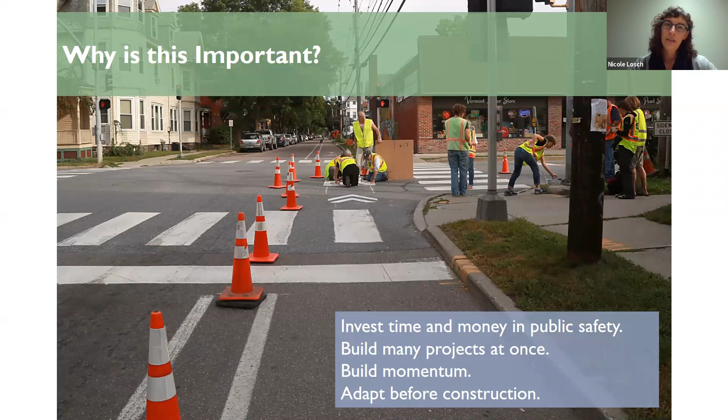What we found is that our quick build projects cost about 25% compared to a traditional construction project. So we're able to do a lot more for safety improvements in a shorter time frame. It also helps us build momentum with the community to get interest and support in these types of projects. It also lets us adapt and make changes to these projects before we come in for that full reconstruction.

When we initially developed this program and some of these projects, there were a lot of questions about whether these are legal projects. Do they comply with the design guides and standards that are out there? Traditionally, our engineers use the Highway Capacity Manual, AASHTO's Green Book, and the Manual on Uniform Traffic Control Devices. We've really looked to the NACTO design guides more recently. They still comply with these other design guides, and by following all of these guides, we found a way to still follow a traditional design approach, just using different materials.

Some of the key principles in the NACTO guides that are leading us to advance our projects are, again, recognizing our streets as public spaces; as we transform our streets and make them great streets, they can be really great for businesses. We're designing for safety. We're designing for our streets as ecosystems.

So as we come back for more permanent construction, we're trying to find ways to incorporate stormwater management and better sustainable and environmental systems. We recognize that our streets can be changed. They've changed over time. I mean, Burlington was originally designed for horses. They've evolved. We're now in the era of really accommodating cars, but kind of transitioning into what we're seeing as more of an interest in accommodating bicyclists, transit in a better way, and pedestrians.

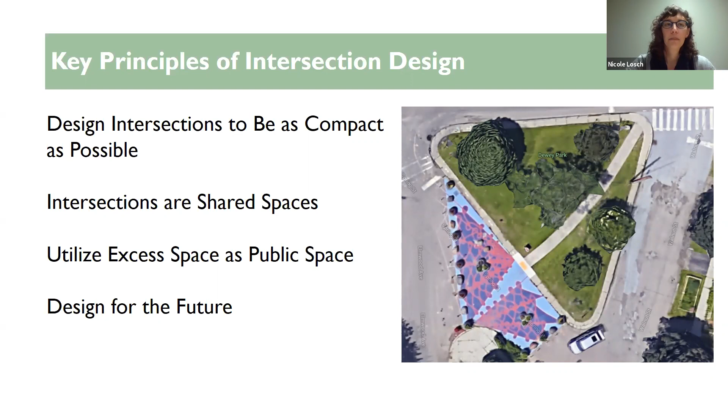So as we've developed our approach to trying to deliver these projects, we have basically a lot of options, and a project doesn't need to follow this in order as it's shown here. They can kind of jump in at any point along this project delivery schedule. But at its shortest time frame, we can do demonstrations. Sometimes these are an hour, they can be a week long, they can be city-led, or we have a permit process that allows the community to lead these as well.

We also have a pilot program. This is established in our city ordinance, actually. It allows us to do these for up to 30 days. That's our most common. But occasionally we'll have a bigger project, and so we will consider how to do it for a longer time frame, and that allows us to just collect a lot more data and allow the community to really adjust to these big changes before making a final decision.

The interim design phase, or our quick build approach, is really kind of mirroring the footprint of a permanent construction project, but we're just using materials that are less expensive and quicker to install, with the intent that it will be in place for usually up to 5 years while we program the funding to come back in and reconstruct it.

So I'll walk through a little bit about our demonstration projects themselves. Again, these are ones that the city can lead, or we can work with the community to let them lead a project themselves. And demonstrations are kind of in our blood here in Burlington. The Church Street Marketplace is one of our most iconic destinations. If you've been to Burlington, I'm sure you've walked along Church Street. It's our pedestrian marketplace, and it started as just a day-long demonstration.

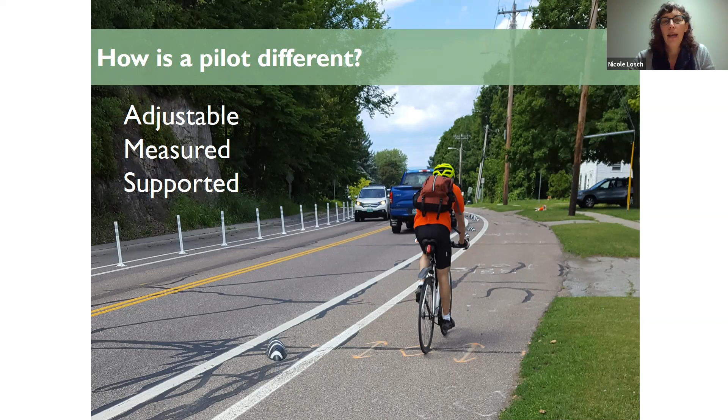One tool that's often helpful with all of our projects is just a way to visualize what's going to change on the street. There is a great tool online called Streetmix that allows you to do this kind of cross-section of a street, and it's really just a mix and match platform. You can change all of the measurements and the street features that are included there. But this can be a helpful component as you're developing designs. Not everyone is familiar with sort of that plan view. It's hard to visualize, and so this can be a good resource.

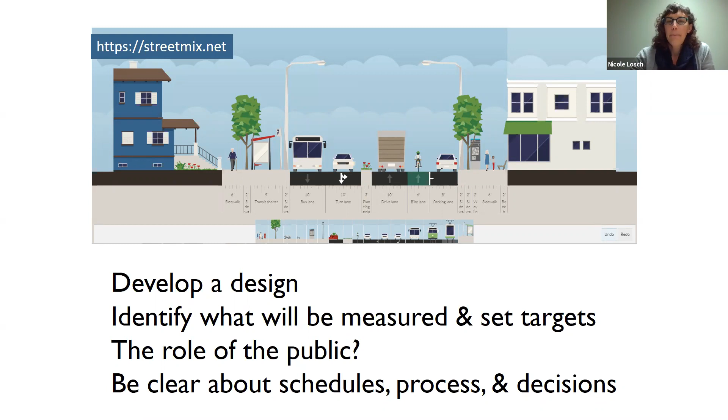The other metrics that are sometimes helpful to consider are things like crashes, travel times. If you're doing the type of project that is going to change how traffic is operating, you may want to measure traffic speeds or volumes. You may want to measure the volumes of other modes as well, and also measuring public input that can often be as important, sometimes more important than all of the hard data itself. So we're always collecting both the quantitative and the qualitative data with all of our pilots.

And again, keeping the community informed. Burlington has really involved community, and so we need to be clear about how, when, and where they can provide input or specifically inform the decisions. We take a lot of time to try to meet people where they are when we're getting this information. We use a lot of surveys and polls, and we recognize again that the public opinion can also hold more weight than some of the hard data that we've collected.

So our last kind of quick build approach in our interim design program, we just have developed over the last year. We have a new design guide as well. So again, we have a link to this on our website, and I've placed this at the end of the presentation, but this is available for anybody to use. It has really two components in the guide itself.

One, we developed design standards, and we wanted to develop these so that we could have expedited delivery even with these small projects. So this has allowed us to really define, how wide can a curb extension be? What are the angles of the curb extensions that we need leading into it, recognizing that our intent is to leave these year round. The snowplows need to be able to operate around them. Emergency vehicles need to be able to get by. So all of these level of details have been included for all types of projects.

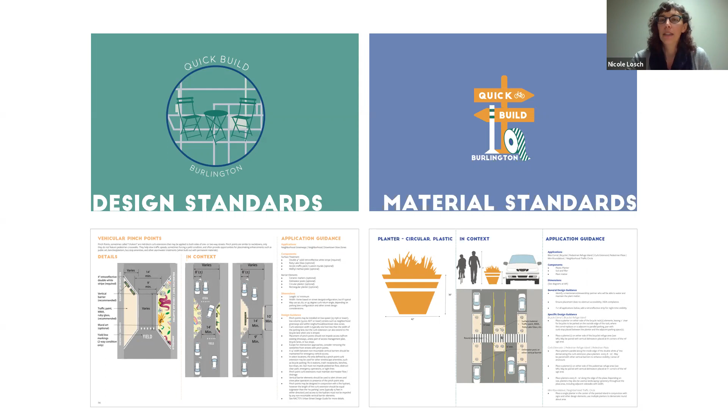And we've also developed our material standards. This will likely evolve over time as we identify new materials that we want to try, or realizing that some are not working well. But again, this helps us, we can do some quick cost estimates at the beginning of the year, have available quotes ready, and just quickly order materials and get a project moving without taking a lot of time to figure out how we're actually going to find the materials to make these projects happen. So this has all helped us to roll out a lot of projects over the last 18 months.

We've also been able to take a lot of our projects that started out as community demonstrations and turn them into a more quick build approach. And so one example was a project that was another AARP grant project. They worked with one of our local businesses that has a machine that can kind of build any furniture that you'd like. And so they sort of made this prefab furniture that the community came together and assembled, and then took it out on site for this weekend-long demonstration that they did at an intersection.

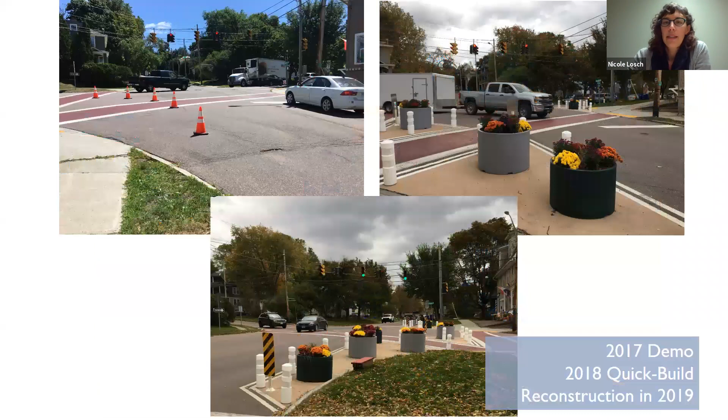This is an intersection that has a couple of small neighborhood businesses. It's in a part of town that's kind of going through some changes, getting a little bit more redevelopment and activity. And so we're hearing a lot about the need to improve this intersection. So this was a weekend-long demonstration, and since then we were able to come back the following year and turn this into an actual quick build.

This shortens the pedestrian crossings. We're still accommodating a lot of large vehicles that are needing to get through this intersection. And we're coming back actually at the end of this year to turn this into a fully reconstructed intersection. This is one where we know it's worked well, and we don't need to wait 5 years before we can come back in to reconstruct it.

Another project that started as a demonstration and then quickly moved into our quick build approach, we did a protected bike lane demonstration. We just used these small wooden craft boxes from the craft store, borrowed some mums from Gardener's Supply, and tested this out with the fire department. It went well, so we came back 2 years later and installed this as a quick build. We used this with plastic bases and these flexible posts. This stayed year-round as well. We used our sidewalk plows to keep it open.

This has definitely been a learning project for us, both for materials and just the general layout. So we're continuing to evolve this one and identify ways to really make it work year-round for everyone who's trying to use the street. It's impacted both by the plows and by cars on a relatively narrow roadway. So this is an area where it's been helpful to try this quick build approach, so that if we are going to build a permanent protected lane here, we really know some of the design challenges that we have to work around.

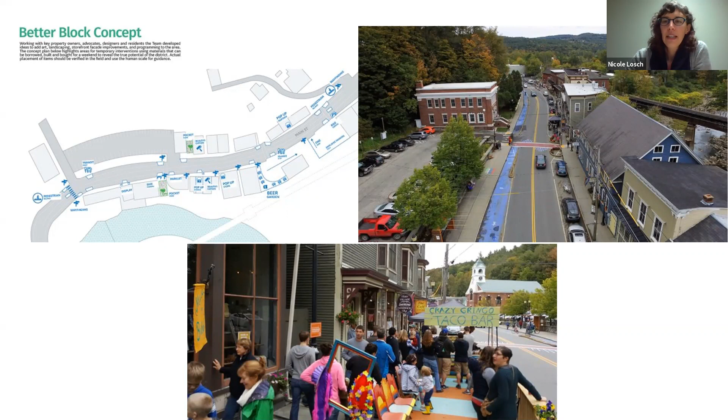And Bethel, if you aren't familiar, is a town that was pretty decimated from Tropical Storm Irene several years ago, and they have been doing a lot of these kind of community projects to keep their community going, and they've really found that working together has helped them rebuild their community after some of that damage.

So I saw some examples of some areas that you were interested in improving over in Westbrook. And so I was trying to scan through and think about some potential ideas for doing a quick build approach in your projects. So first, just kind of an overview of understanding, are you going to do a quick build? Are you going to do a more interim design? Do you think you need to do a pilot? And so some of the questions that you may want to ask as you're developing this is just trying to understand, are you introducing a concept? If so, you may want to do a shorter term project to really gauge the impact and the support.

If you need to collect clear feedback or collaborate with other agencies, you may want to consider a pilot. The same for collecting data and building support. If you need to have a lot of documentation to show why this could be a successful project, a pilot may be the way to go. If you're just redesigning or trying to install a project based on existing feedback or advocating for safety improvements, you can usually just jump right into one of the quick builds or the interim design approaches. And to find funding, you can kind of use any of the approaches if you're really just trying to advocate for a way to have this be a more permanent installation.

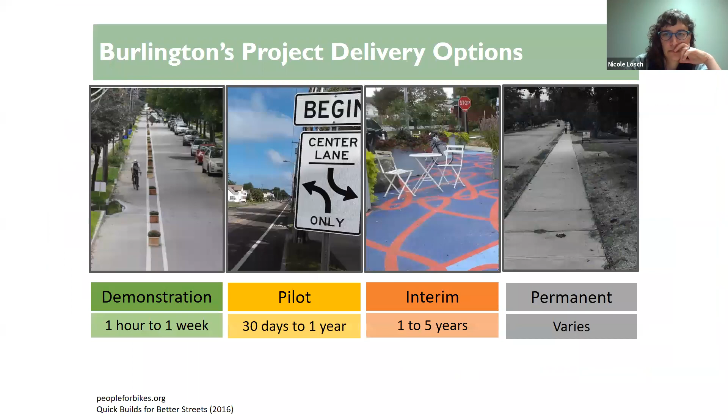And also have, I think, those white type of delineators in there. There's a lot of stuff in the roadway. Yeah. And in wintertime, because when those are buried under snow, those are hard for a plow driver who's been plowing 18 hours, and all of a sudden all the zebras are on the sidewalk. Right. The zebras.

And the snow basically then builds up in between the bumps, melts again when the weather warms up enough. But with the snow packed in between, it basically just functions more like our typical speed humps that are just continuous all the way across. So it's like speed bumps with wheel ruts cut in them. Exactly. Okay. I like that.

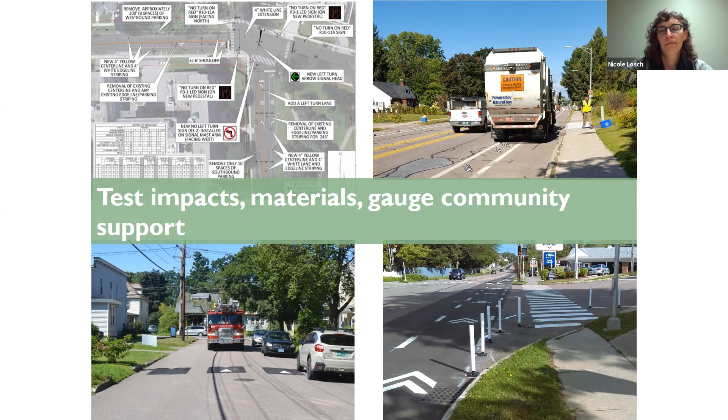I have a question. This is for Robert at DOT. Let me preface this a little bit by saying I previously worked in a community that had a similar downtown or commercial district, and it was on a highway. Eventually, the city took over ownership of that particular part of the road, that is to say the maintenance, et cetera, and took away those sort of financial responsibilities from the state.

I have no idea if the city of Westbrook would be remotely interested in that. But I guess my question to you is, if they were and were willing to take on those financial responsibilities, is that something the state has done historically? I ask this in the context of it might be easier to implement some of these ideas in the long term, not just for Westbrook, but for any other Maine community that has a similar situation.

Right. Well, a good portion of Westbrook is in the urban compact zone, so the city has the responsibilities for maintenance and upkeep of those areas. So I guess your question is, if a community wanted to take over a state road in a particular area to try to implement some of these changes, our focus is going to be on safety. We're going to want to look at what the speed limit is on that section of the highway. There's certain things that may not be allowed based on whatever the speed might be going through there.